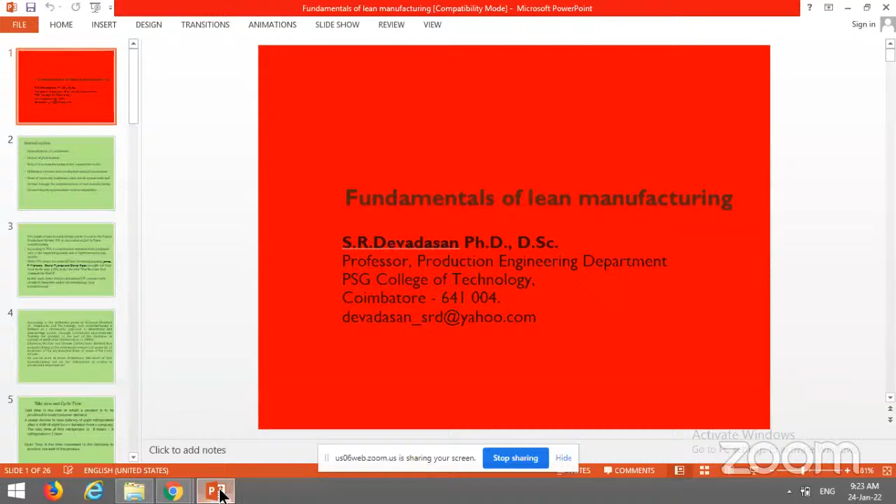Some of the journals in which his papers have appeared include International Journal of Quality and Reliability Management, International Journal of Operations and Production Management, Production Planning and Control, Journal of Quality in Maintenance Engineering, Benchmarking: An International Journal, International Journal of Managerial Auditing, International Journal of Six Sigma and Competitive Advantage, and TQM Magazine. He is a fellow member of the Indian Institution of Industrial Engineering. 25 research scholars have obtained their PhD under his guidance, and 4 research scholars are currently pursuing PhD programs under his guidance. He has delivered several technical lectures at various podiums to both researchers and practitioners. His research interests include strategic quality management, total productive maintenance, total productivity engineering and management, agile manufacturing, business process re-engineering, innovation management, supply chain management, benchmarking, and Six Sigma programs.

He has first-authored the book titled Lean and Agile Manufacturing: Theoretical, Practical, and Research Futurities, which was published by Prentice Hall of India Private Limited, New Delhi, in 2012.

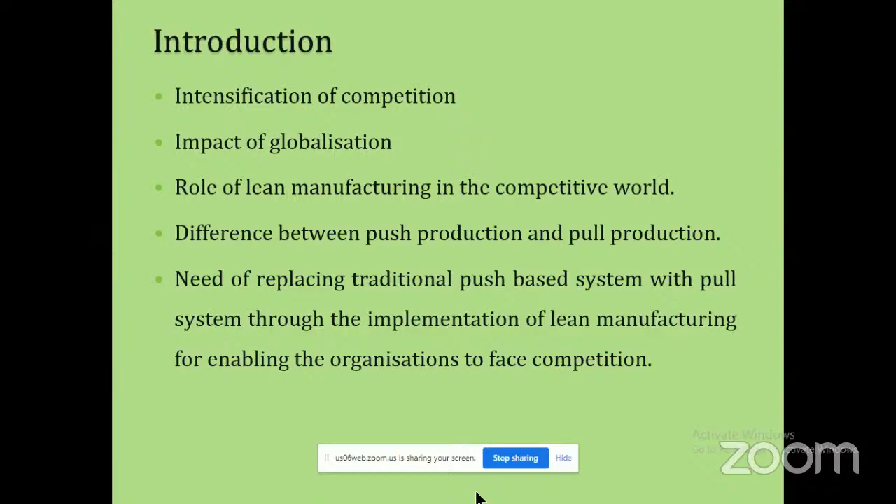So the practices leading to the implementation of lean manufacturing have to be studied, and we need to know from which end we have to start and what kind of output we will finally achieve. There are companies named A and B. If company A has to become lean, what practices does it have to follow? If company B is already practicing lean manufacturing, what symptoms will we be able to see in that company? These are all the aspects we will learn during the coming little more than 1 hour.

Let me come to the next screen. It is the summary of what I have said. James Womack, Daniel Jones, and Daniel Roos are the three authors who worked further on just-in-time manufacturing, which occurred in Toyota company Japan, and they brought out the book in 1990 under the title "The Machine That Changed the World." The e-book is also available on the World Wide Web, and I request all the

Sir, the other sir. Sir, ask him to log out and log in once again. Many times Zoom hangs in between a lecture. Okay, I'll call him. Right, sir. The screen is visible, but the audio gets muted.

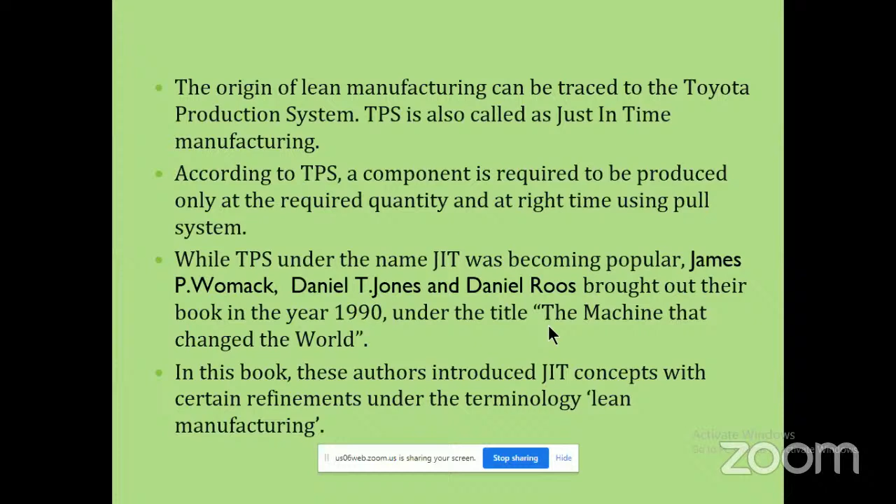The other sir is audible? The other sir. The other sir. Okay, participants, please wait. I'll call him over mobile. Participants, please wait. I think his internet got disconnected. So wait for a few minutes.

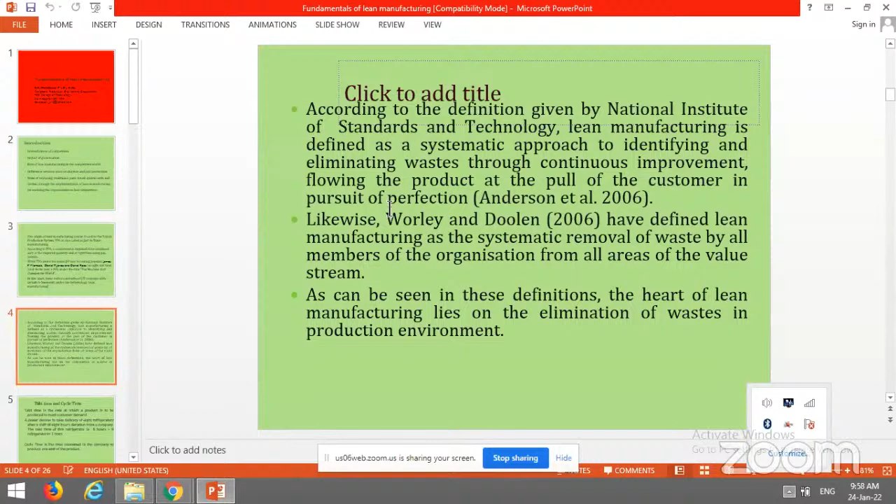Share screen. One minute. Yeah, that's it, sir. Yes, okay, I have connected through my mobile. Okay, sir, thank you. Yeah, slide is visible, sir. Visible? Yes, sir. Green color slide. That is according to the definition. The first slide is visible, sir. Okay. Earlier it was on our Wi-Fi, now through our main mobile phone. Okay, sir. Please continue, sir. So I'm audible also? Yes, sir, audible. Okay. Sorry, friends. No problem, sir. It happened unexpectedly. Please proceed, sir.

Anyway, many authors and researchers have brought out the definition of lean manufacturing. In essence, lean manufacturing refers to the set of activities that would enable the company to produce the products and services without incurring any waste or losses, and ensuring that all the activities that are performed will be only useful. So the quality of the products and the service will improve. On the other hand, the cost of production and the cost of offering service will go down. So this benefit can be transferred to the customer in the form of price reduction.

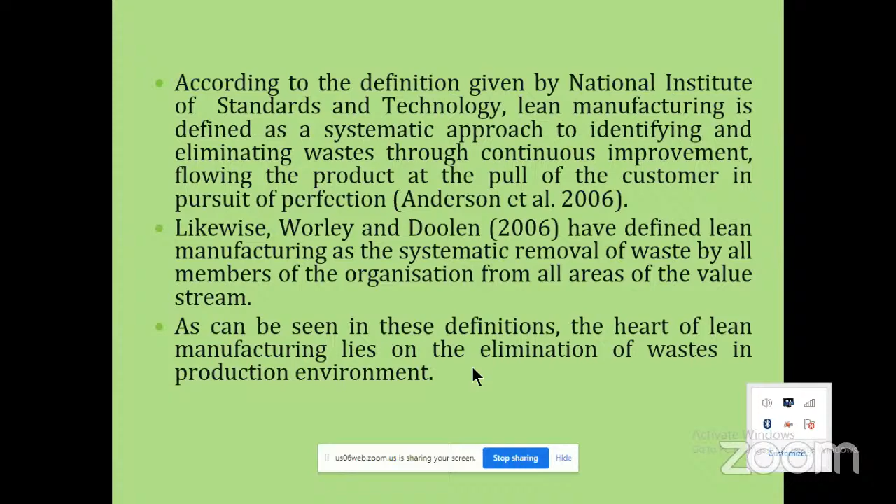As you can see, the heart of lean manufacturing lies in the elimination of waste in the production environment, as well as in the environment in which services are offered. Certain terms and approaches have been utilized in this regard to ensure that the right quantity of products are produced and exact services are provided. One term that is used is takt time. In lean manufacturing many Japanese terms are used, but this term has come from the German language. Takt time refers to the rate at which a product is produced to meet the customer demand. One example is also given.

For example, a customer has requested delivery of 8 refrigerators at the end of the day. One shift is there, of 8 hours active duration, so 8 refrigerators are to be ready. The customer places the order, the work effectively starts by 8 o'clock, and by 4 o'clock it becomes 8 hours, when the customer will come to take delivery of these 8 refrigerators. Before starting the work, the company has to make all preliminary activities. It has to provide all the infrastructure, training to the employees, all the details, and facilities like tools, drawings and so on. So now, okay.

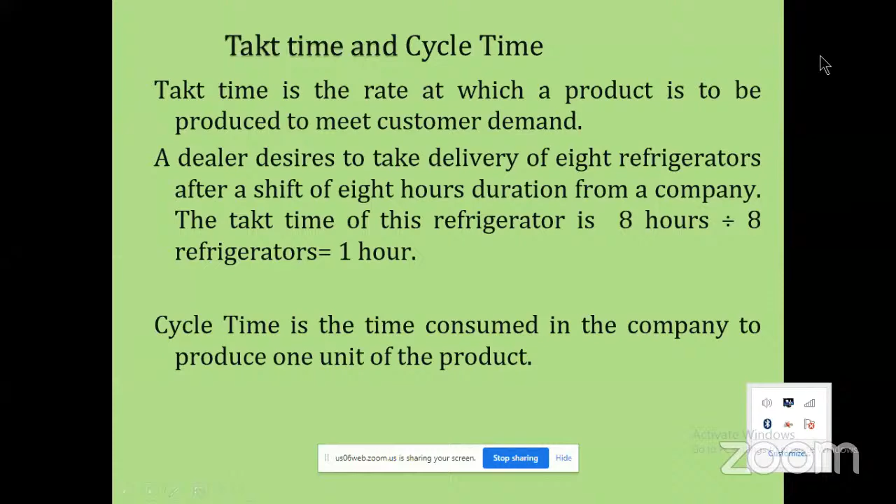Hello? Hello? Devadasan sir. Devadasan sir, please unmute sir. Devadasan sir. Now, are you here? Yes sir, audible now. Is it audible now? Okay. Sir, it is audible now. Are you able to hear me now? Yes sir. Is it audible? Yes, sir. It's audible, sir. Am I audible to all of you? Yes, sir. Audible, sir.

So in that case, in half a day, they will allot less number of facilities, less number of people, so that the 8 number of pieces will be ready only by 4 o'clock. Then the excess infrastructure and the resources will be utilized for carrying out some other activities for producing the products and service. So this is one term.

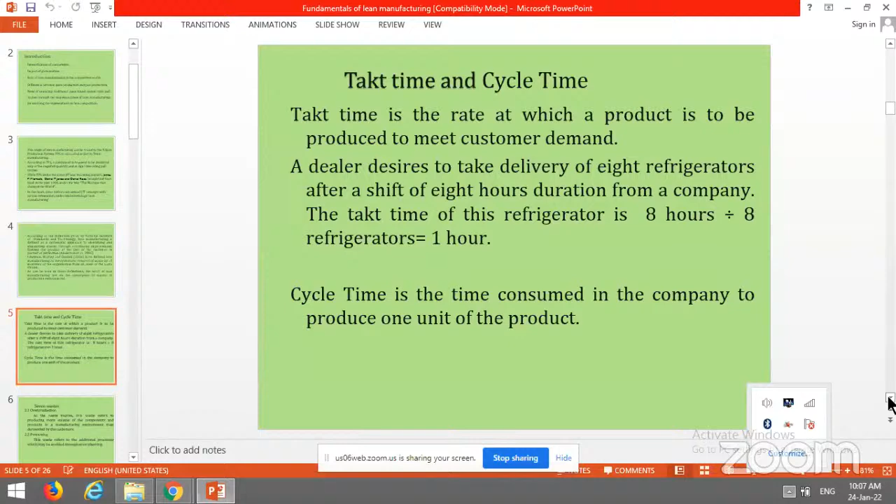Then lean manufacturing lies on the elimination of waste. So what are regarded as waste? One waste already mentioned, that is overproduction. In the case of the mass production system, the operators come to the workplaces and they keep on producing the goods. At the end of the day, customers may require 8 refrigerators. They may produce 10 refrigerators. So the remaining 2 refrigerators have to be sold in the market by applying push system, like through advertisement or offering discounts and so on.

Then the other one is over processing. Here certain processes are required, some process may be additional. For example, we may use the network system, and it may be required to check the entry of the data at one point of time. But in this company, they may be checking the entries at several places. So because of this, the over processing of activities takes place. That much effort will be wasted.

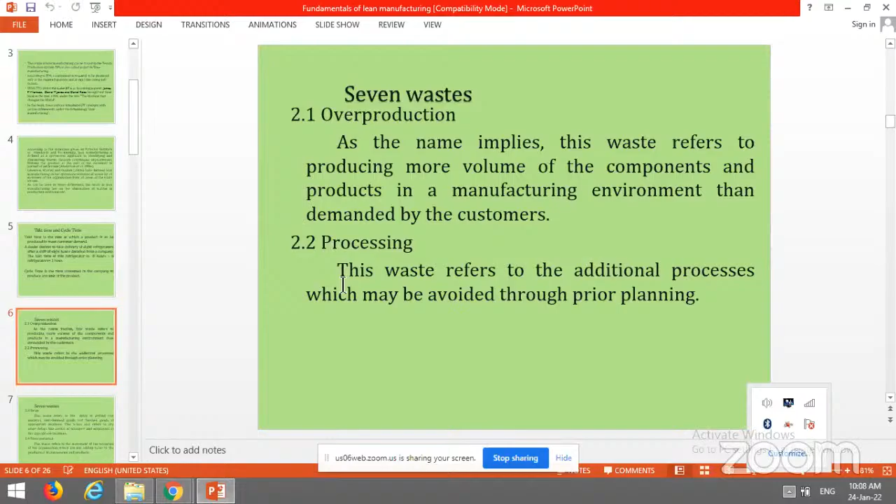Now are you seeing this in 2.3? Now I'm showing the first screen. Devadasan sir, are you able to see the first screen now? Yes, sir, I will share it. Can you stop the sharing? Should I stop sharing? Yeah, sir, please stop sharing. Okay, now I have stopped sharing. Participants, now the slide is visible. Sir, which slide do you want to continue? 2.7, defective parts. Please press F5 to proceed. I will control the slide. Now 2.7 is visible. Sir will continue 2.7, defective parts.

Will the participants be able to interact if I ask one question? Yes, sir, the participants can interact now; they can unmute themselves. So can any of you tell the short form of the 7 wastes I mentioned? I mentioned one short form to remember the 7 wastes. Participants, please interact with the speaker. You don't remember the 7 wastes?

In the literature world, experts use a short form, on expansion of which we get the 7 wastes. Do you remember the term I mentioned? Can any one of the participants tell that? Okay, one participant has responded, Mr. Dhyaneshwaran. Thank you. Anyway, more wastes have also been identified by many researchers. Then I was mentioning the difference.

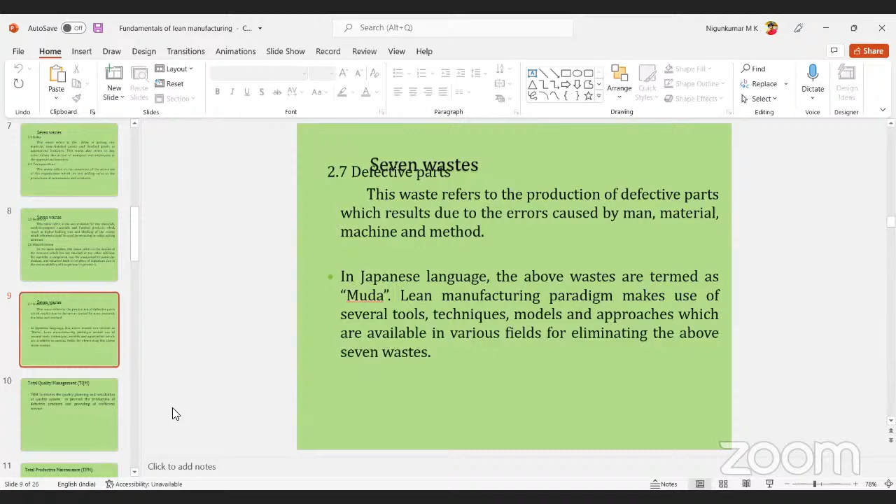Not only that, in a company in which a mass production system is followed, when we have to implement lean manufacturing, we need to follow certain steps. That also has to be carried out using certain tools and techniques. Some of those tools and techniques are very unique to the lean manufacturing field, and some of them are applied in other fields also. From the next slide onwards, for a few slides, we will see this.

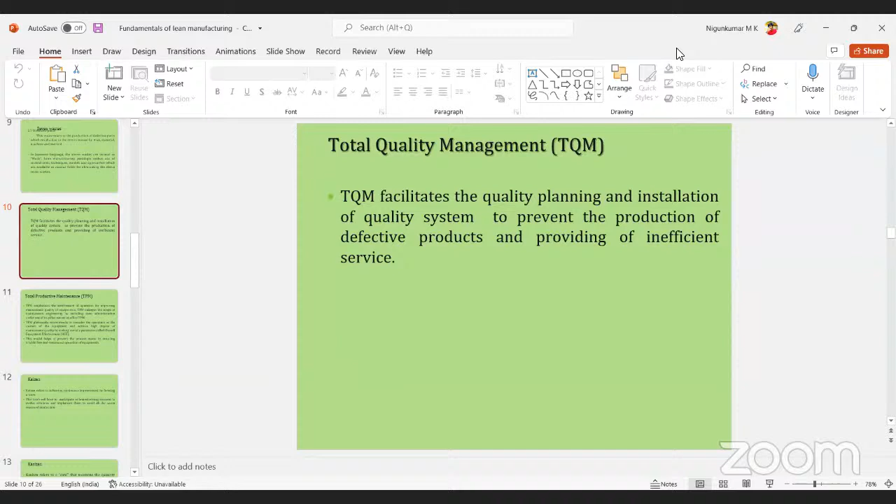Next slide, please. Then comes the machinery. We were talking about the exact quantity of the goods that we manufacture. In case the machines fail, the process will not be interruption free. There will be heavy interruption, and then we cannot fulfill the customer's requirement. A little time back I was mentioning takt time. Every 1 hour, one refrigerator according to that example has to come out. That is possible only if the machines are well maintained.

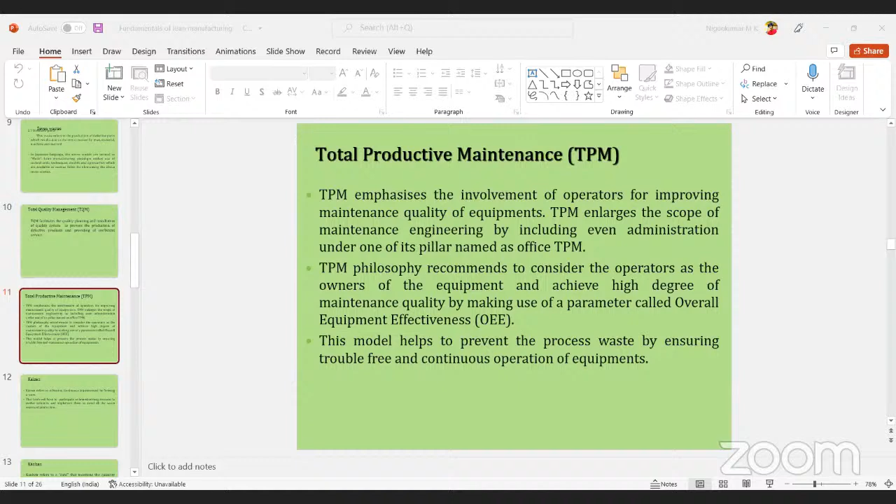So for this purpose, while implementing lean manufacturing, the concept of total productive maintenance has to be applied. The effectiveness of these machines is measured according to this approach by a term called overall equipment effectiveness. According to this approach, the operators have to think that they own the machine, and they have to separate the problems and see that the machines are running without any interruption. Next slide, please.

Then, yet another Japanese term, Kaizen. It's a term used in the Japanese language: Kai refers to continuous, Zen refers to improvement. For a very long time, Japanese engineers and managers began to realize that the division of labor was very wide in the companies. As I mentioned a little time back, the employees are divided as officers and operators. The operators possess practical knowledge, the officers possess theoretical knowledge. The bridging of this was not happening.

So for this purpose, a Japanese expert by the name Ishikawa brought out the concept called quality circle. Using this approach, when a particular problem or task is taken, the employees associated with that task or problem solving effort, irrespective of whether they belong to the officer cadre or the operator cadre, will have to become members. That will become a quality circle. In that quality circle, they discuss the problem, come out with solutions, and present them to the management. In many cases, after presenting the report, the management did not take much action.

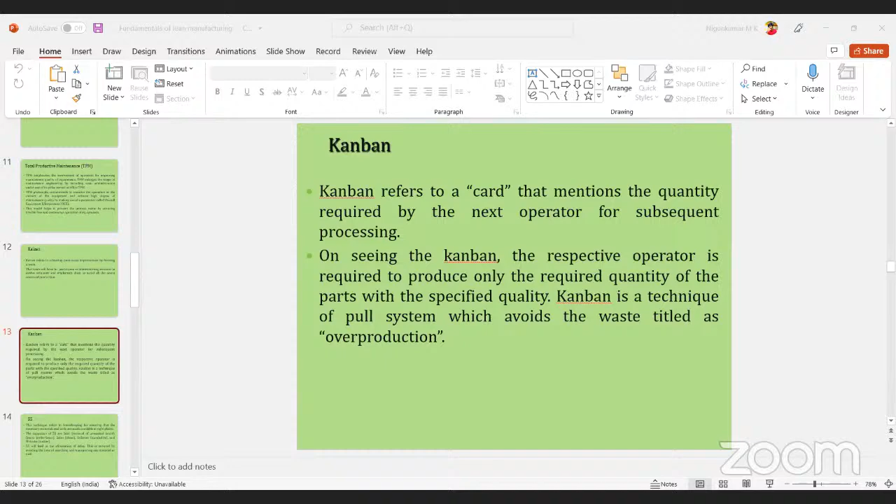Next slide please. Kanban card actually helps to ensure that the pull system is followed, then overproduction is also avoided. Then comes housekeeping.

It is, in the English equivalent, sort, set in order, shine, standardize, and sustain. One thing is that all unwanted items are to be removed, and in particular order they need to be kept, so that a standard procedure is followed to carry out the practice. For example, if there's a practice to keep a drill in one particular place.

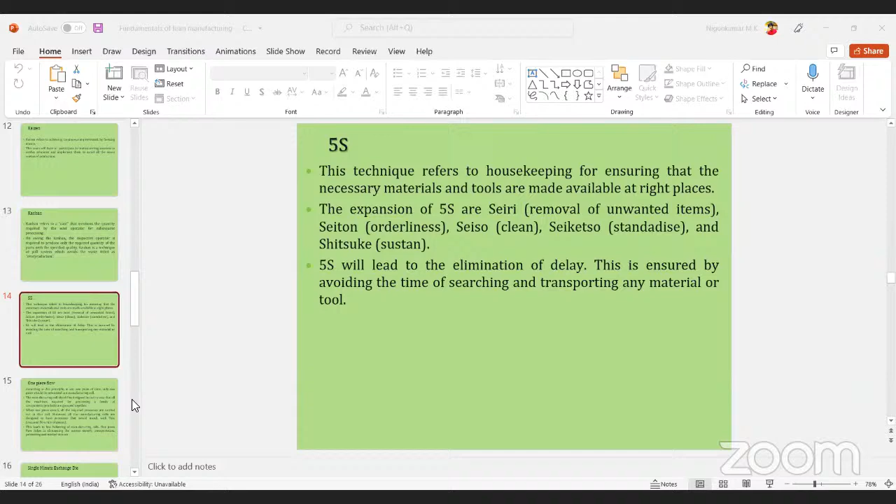A little time back I was telling, in the case of the lean manufacturing environment, only the piece or the unit that is required to be machined will be in the machine at any one point of time. So there will be no piece in between the subsequent machines. Then what will happen once this machining is over?

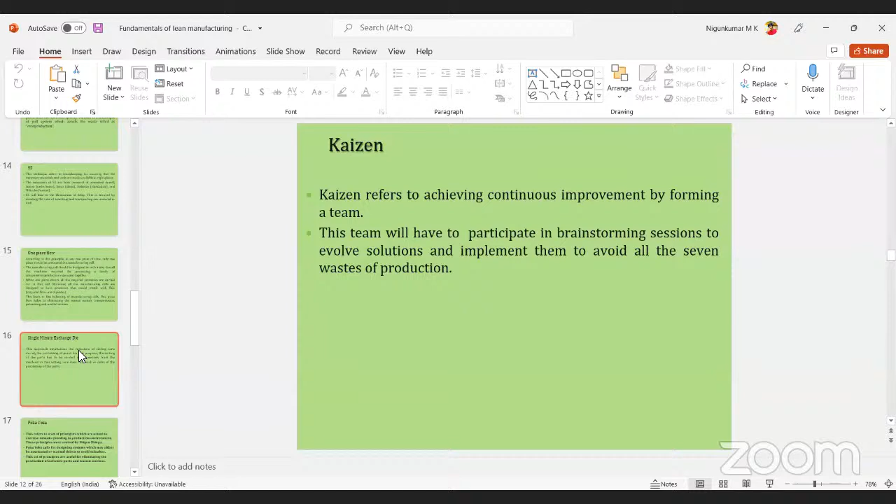They will be very much synchronized in such a way that in one machine or in a set of machines, the time taken will be synchronized with the subsequent machines or set of machines which are kept in cells. For example, if there are, for simplicity sake, let me assume 5 machines kept in succession. So the processes will be synchronized in such a way that every machine consumes 15 minutes to machine components.

So what will happen? Once the first piece is machined, it will go to the second machine. By the time it goes to the second machine, the second piece will enter the first machine. Then when the second piece is machined in the second machine, it will go to the third machine. So by the time the third piece enters the first machine, the second piece will move along as well. Likewise, it will happen this way. So at any point of time, if there is movement of units or pieces, there will be one piece in between each machine.

This will be the scenario prevailing in the lean manufacturing environment. So now the scheduling has to be done in such a way that groups of machines are made together, so that in every cell, equal amount of time is actually consumed.

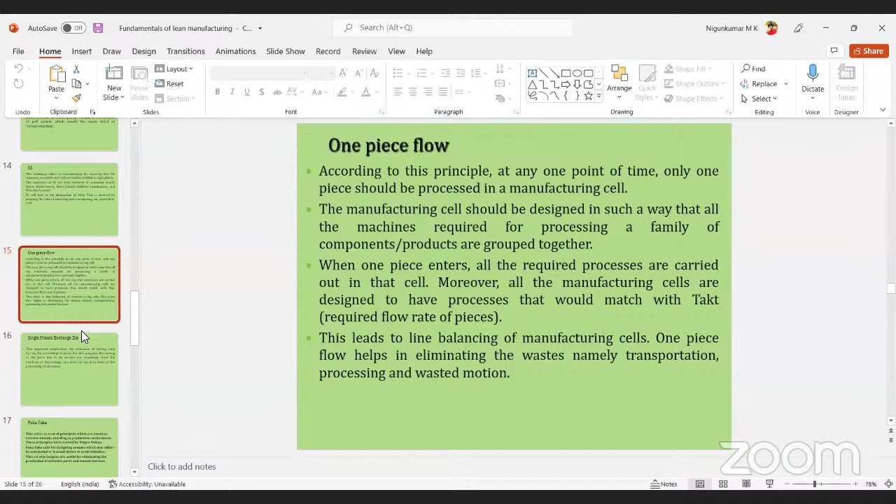Next slide, please. Single Minute Exchange of Die, SMED.

Here the efforts are made to reduce the time. In the field of mechanical engineering, we know that in the case of making a casting, about 75% of the time is spent on developing the mold. Then only 10% of the time will be used for pouring the molten metal. The remaining time will be subject to other preparation. So the active process is only pouring the metal.

So now the molds have to be prepared separately. They should not be done in sequence; they should be kept ready already. For example, they can work at night to prepare the mold, and by the morning it is ready, so immediately molten metal will be poured into it.

So according to SMED, the activities will be classified as internal and external activities. The internal activities have to be done in the machine, and the external activity has to be done separately, so that the lead time or cycle time of producing the products can be reduced.

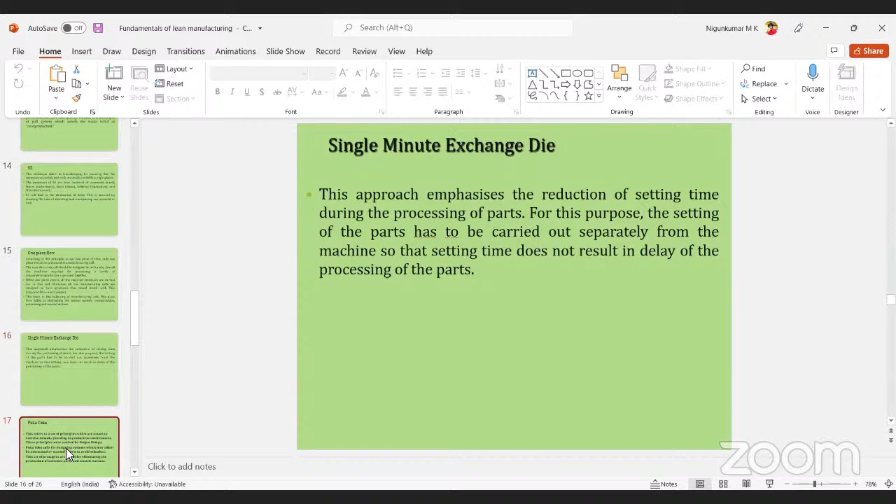Next slide, please. Then comes the mistake-proofing approach. In the lean manufacturing environment, we know that the last letter D stands for defect, and the production of defective pieces is required to be fully prevented.

So when Kanban is also used, there should be no defect. I talked about tailor, the example of tailor stitching the shirt. Care has to be taken in such a way that no defect takes place. For example, when an assistant tailor is given a Kanban, which is nothing but a sheet of paper mentioning that 5 square-shaped buttons are to be stitched, by mistake he should not stitch 6 round-shaped buttons instead.

So this defect should be prevented. Now we have to see how that mistake is prevented from happening. So what's the solution for that? In the case of the tailor example I mentioned, we need to have the involvement of one more person, who has to check that the buttons taken out are correct.

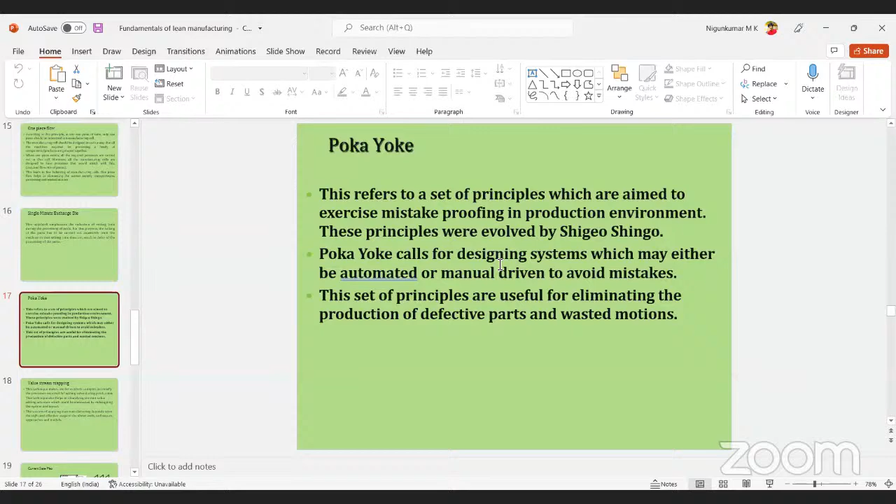For a very long time, engineers were following different approaches. I said that by 1990, in the book The Machine That Changed the World, lean manufacturing was introduced. Afterwards, for about 5 years, engineers were following different approaches to carry out the lean manufacturing patterns, and engineers, managers, even researchers were not very sure of the distinct steps - what should be the first step, what should be the second step, and so on.

So at that time, one technique called value stream mapping was brought out, way back in 1995. It is a very unique technique that can be used for implementing lean manufacturing in an organization - it may be a manufacturing organization or a software manufacturing company. It actually goes through 4 phases.

In the first phase, the product has to be chosen - sometimes it may be a group of products which may involve almost the same stages of production. Then the activities that are currently taking place should be captured. That is captured by drawing a map called the current state map - what is currently happening is mapped, and that map contains the features which are relevant to implementing lean manufacturing.

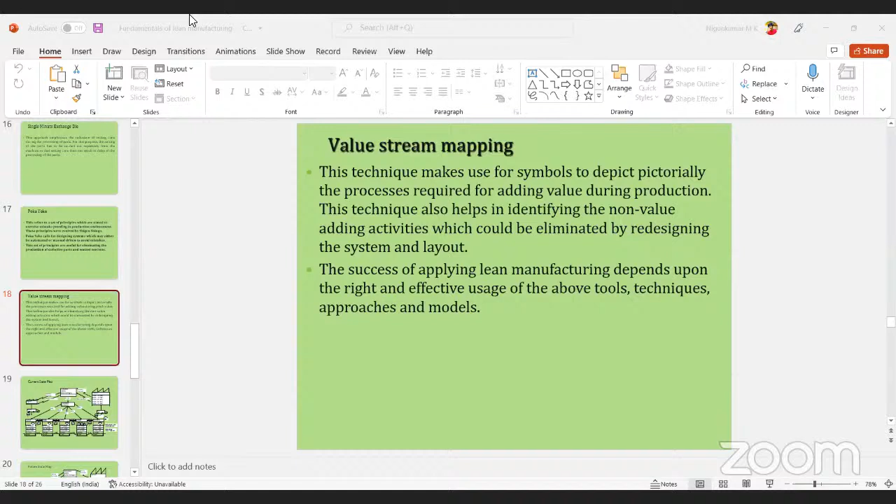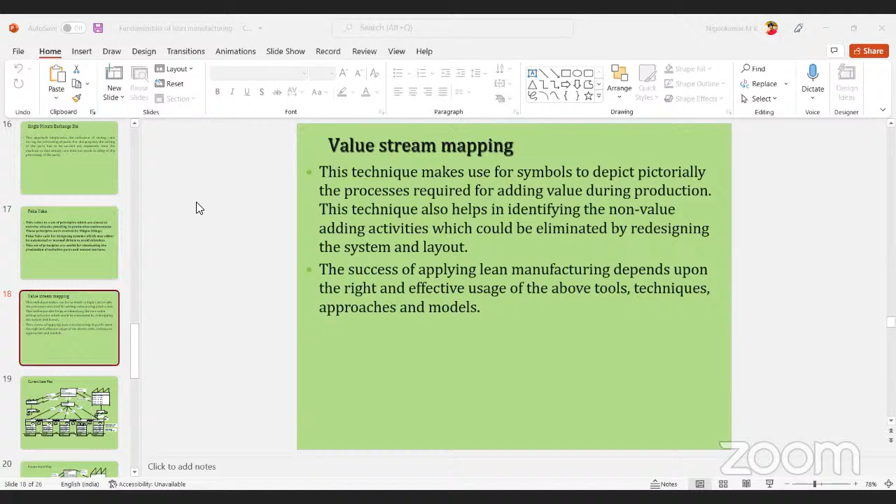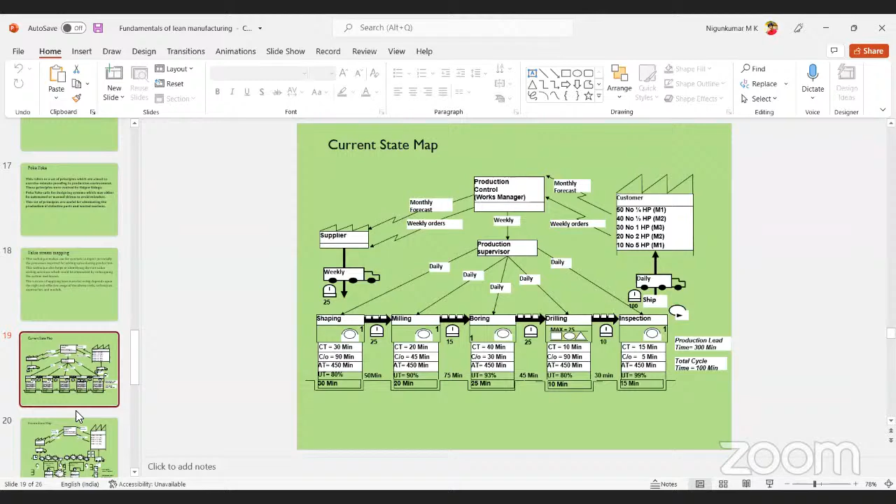You can see some unique symbols are used in this case. This has been drawn by referring to the current practices that are followed. For example, this symbol refers to the number of operators - only one symbol is there, meaning only one operator is there.

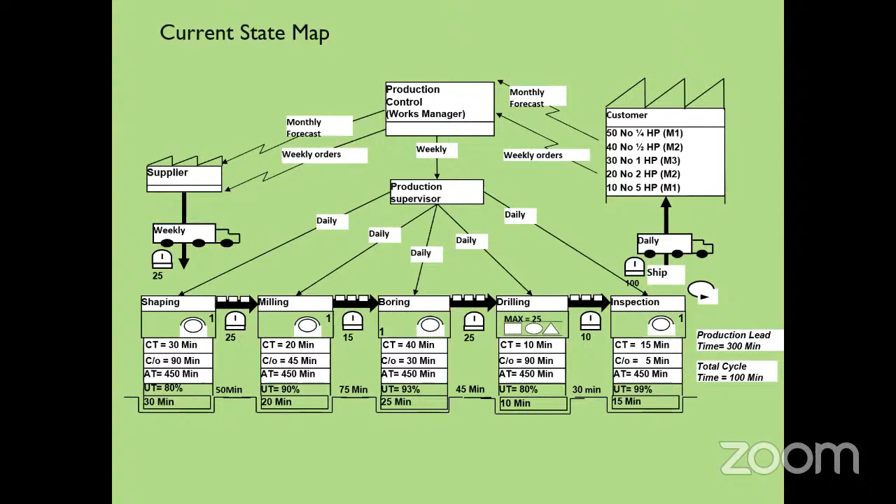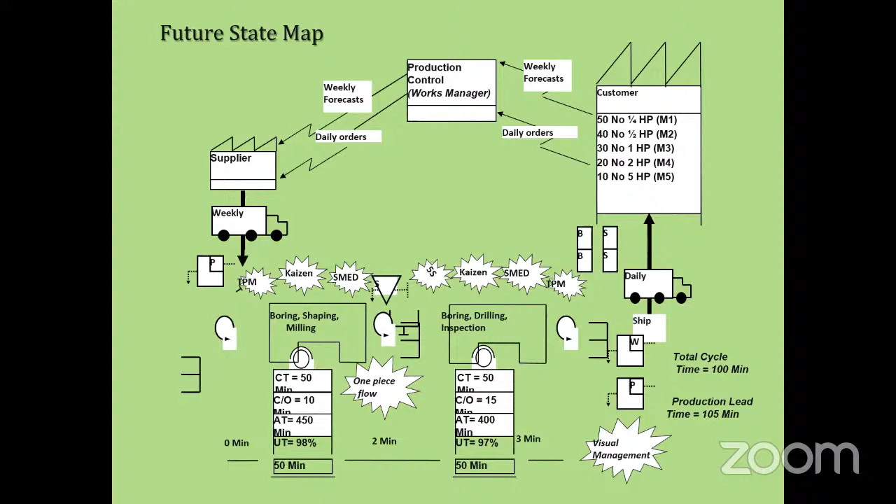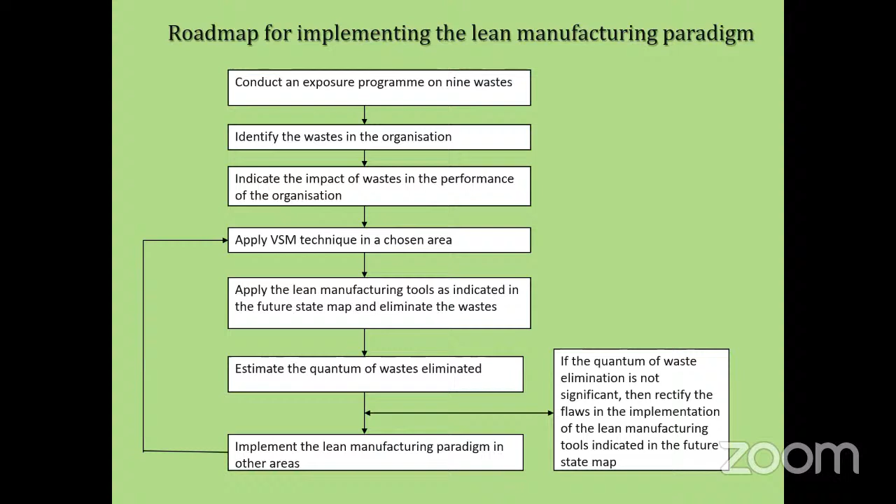Next slide, please. Okay, so lean manufacturing forms the foundation for acquiring competitive strength. And now, thanks to the emergence of Industry 4.0, we have many techniques. In the morning, the principal mentioned the roles that we all have to play. So we need to learn about Industry 4.0 and its concepts, and with that facility, we need to implement lean manufacturing and achieve the goals of lean manufacturing. Next slide, please.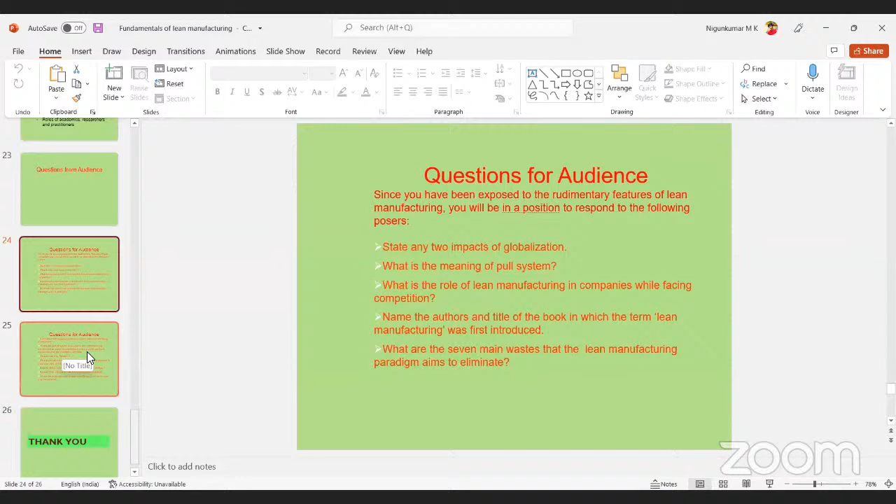Dr. Karthikeyan? Yes, sir. It seems there is some difficulty in responding. So let me move to the next slide. Some more questions are there. Next slide, please. Speaker can unmute now. Satya Prakash, you want to speak, no? Okay.

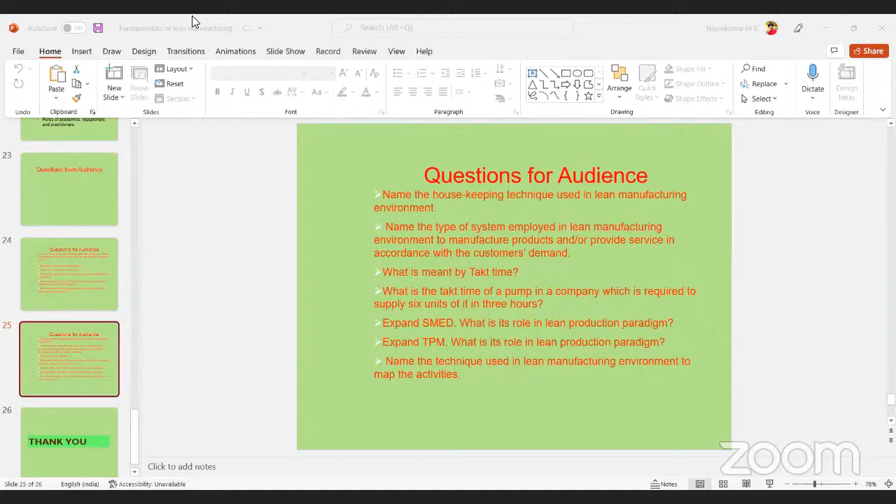Expand SMED? Can any one of you expand SMED? It is 11 o'clock. Nobody's responding, it seems there's some problem. You bring it to the thank you slide. Yes, please show the thank you. Okay, sir, they are shown as responding. Yes, expanded SMED: single minute exchange of die.

Okay, thank you. You can also try to answer the other questions that have been given here, because it is exactly 11 o'clock. Let me complete it. It is very difficult to deal with fundamentals within 1.5 hours, but anyway, I have given it in a capsule. I hope the subsequent speakers will also throw light on the fundamentals and then proceed, so you will be able to capture the points exactly. I wish all the participants to acquire knowledge on implementing lean manufacturing in Industry 4.0 through the subsequent steps. Thank you very much.

Thank you, Devadasan sir, for the wonderful lecture on the fundamentals of lean manufacturing. What you said is correct: within 2 hours it's very difficult to cover the fundamentals of lean manufacturing, even though we got basic information about various tools used in lean manufacturing, such as single minute exchange of die, poka-yoke, and value stream mapping, and also the various goals of lean manufacturing. In the last 2 slides we discussed various questions and a road map for obtaining lean manufacturing.